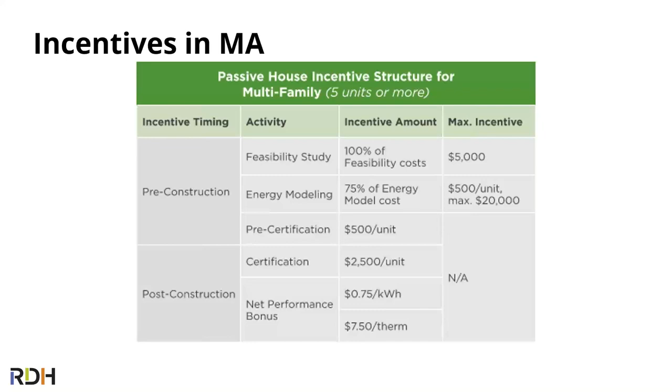And passive house has really taken off here in Massachusetts, and I know is in Connecticut as well. I see emails all the time right before the holidays - I saw many Connecticut multifamily projects being certified through those email blasts. So it's really taking off.

This is another slide courtesy of DOER from that presentation, and that Bunker Hill project is actually one that RDH is involved in, a very large development, which we'll show shortly. But many architecture firms are taking on the challenge of designing these passive house buildings. Passive house consultants - architects are becoming passive house consultants. Ideally, clients are too. It really helps when everyone is speaking the same language. So Passive House really provides that common language, which is really in sync with the goals and strategies for achieving decarbonization.

In Connecticut recently too, decarbonization was signed into law. And it's interesting, we'll see, it will be all similar strategies as well. The Connecticut incentives reflecting similarly the incentives in Massachusetts as well.

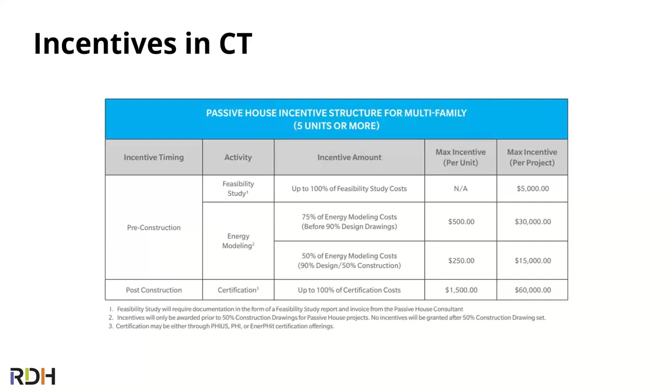So of course, RDH performs passive house feasibility studies as well. It's basically the first step we take in a passive house design process anyway, and it's great that these local incentive programs are supporting this step as well. It's at this point that we define certain targets relative to achieving the passive house standard.

What are the R values of roof, wall, slab? What are the U values of window? What is the percentage of glazing that we currently have, and what would it need to be if it needed to be reduced at all, decreasing solar heat gain, things like that. Taking site orientation and shading into consideration, all these things, we can determine the feasibility of a particular project achieving either the PHI or PHIUS standard.

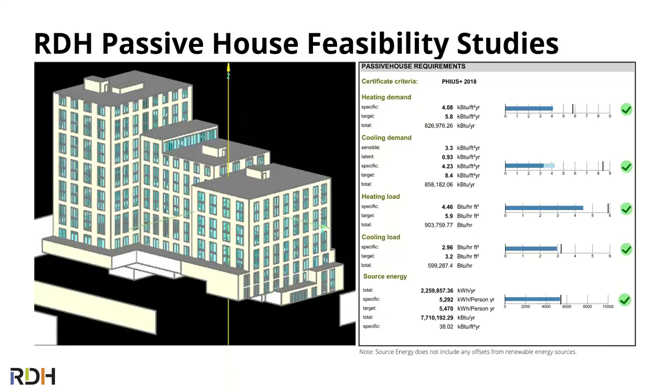In this case, this is a screenshot from the WUFI passive modeling, which is software used for PHIUS certification.

So architects and engineers are responsible for adaptation. For those in the high performance building community, there's a lot of talk about adaptation and mitigation. And buildings need to protect human life in an increasingly hostile climate. This is not unfamiliar to many folks.

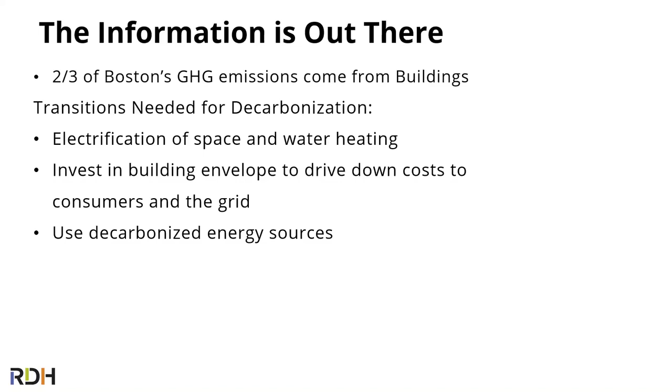The decarbonization report for Massachusetts actually highlights particularly 3 steps needed for decarbonization: electrification of space and water heating, investing in the building envelope, which will drive down costs of energy for consumers and the grid, particularly if we level off those peak times, and using decarbonized energy sources, i.e. renewable sources of energy to run electrified buildings, taking the on-site combustion out of the equation, as well as at the grid level.

So the information is out there. We know this. The result of our carbon emissions, if we fail to curb emissions, may look something like this. Zeroing in close to home here, among the report released recently by NOAA, they've got a great online sea-rise simulator that you can go play with, and I urge everyone to go check that out. Taking Boston at its worst case high tide mark 100 years from now, this is what Boston could look like at high tide if we fail to curb our current emissions.

Thankfully, we are taking steps to do so, but this could be the most extreme level of result.

Regardless, NOAA predicts that even curbing our current level of emissions could lead to about 2 feet of sea level rise on the US coastline by 2100. So resiliency and carbon emissions, again, are tied together. And as we know, much of that is coming from our buildings. So what do we do about that?

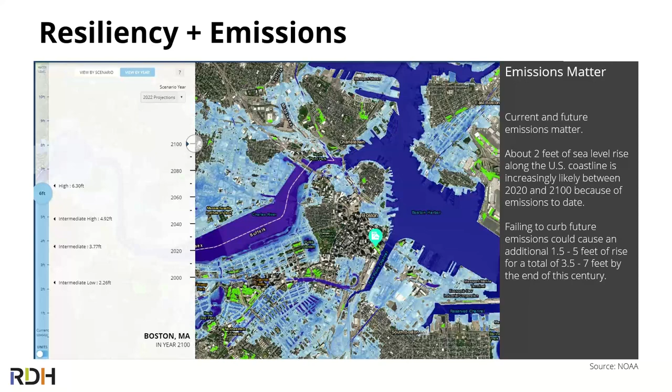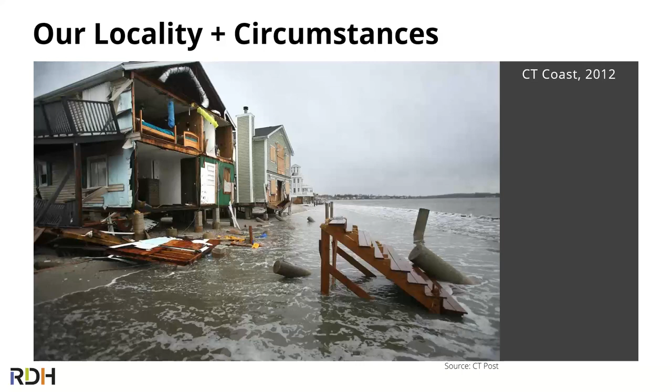It was kind of unbelievable to see this actually happening. And of course, 2012, after Hurricane Sandy, the Connecticut coast, along with New York and Long Island, really took a beating. Just looking back at some of the images for that. This is our locality now and our current circumstances. Our circumstances in our locality have evolved.

So just taking a look at the standard of care for architects, it's worth taking a read through this. The architect shall perform its services consistent with the professional skill and care ordinarily provided by architects practicing in the same or similar locality under the same or similar circumstances. The architect shall perform its services as expeditiously as is consistent with such professional skill and care and the orderly progress of the project. So again, our locality and circumstances are evolving.

So really, it is on us as architects and engineers to plan for adaptation in our buildings. Every building needs a plan. We need to adapt for flooding, overheating. We need to reduce our greenhouse gas emissions to zero. We need to strategize for future carbon penalties.

They're not here yet. They are in Canada. Monte can attest to that, and increasing. We see a preview of this with Local Law 97 in New York City, right? Phased penalties for certain levels of carbon emissions from existing buildings over a certain size. That'll be interesting to keep an eye on. In the range of carrots and sticks, that's the biggest stick we've kind of seen to date.

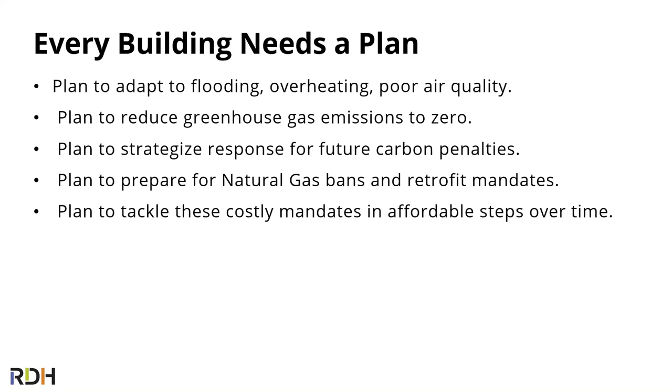So, case studies. I have a series of more local passive house projects, which by comparison to some of those in British Columbia may seem somewhat primitive, but it's some of our first steps, some of our first generation of projects here in the Northeast. The interesting thing about some of these projects was I personally played a slightly different role in some of these projects.

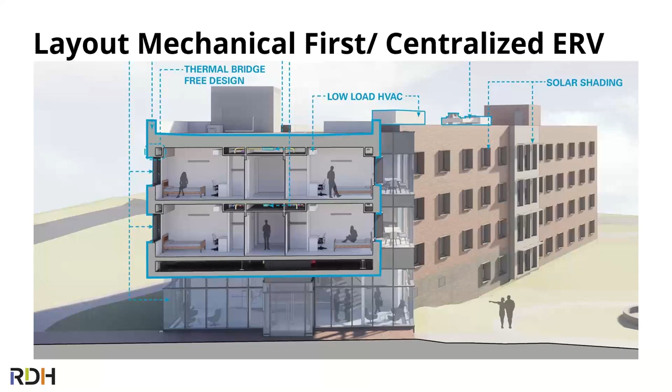Other points from Monte's pattern language presentation are highlighting brise soleil. So shading was carefully considered to reduce peak cooling in this building, which is often one of those key targets in larger multifamily projects, that peak cooling tends to be one of the closest to the limit. So with the larger buildings, there's greater internal heat gains from people and equipment, and therefore we don't want to rely as much on solar heat gains, and in fact want to limit them in larger multifamily buildings as compared to smaller single-family passive house projects that you may have more traditionally seen.

So in this particular instance, this is achieved in a couple of ways. The typical punch window opening takes advantage of the thick buildup of the brick, basically rain screen assembly, as well as projecting a brake metal surround beyond that to achieve about 17 inches of shading on the typical punched opening, which as a 5-foot square was adequate to shave off enough of the solar heat gain to keep our peak cooling under the limit.

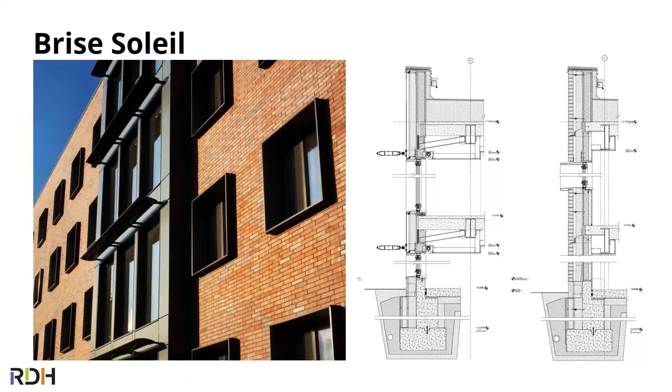Another one I had the pleasure of working on while at SGA was the Garfield House at Williams College. I was not the project architect on this, but I jumped on and performed a sort of in-house passive house consulting role and helped develop some of the enclosure detailing for this project as well.

And this example shows how passive house buildings can take the form of any type of building. In this case, a sort of larger wood-framed vernacular New England type of residential building. So the typical floor plan centers around a large common space. It's a 40 bed building consisting of 4 and 6 person suites.

Some inefficiencies occur with a less dense floor plan here. Cost per bed goes up in this suite type of layout clearly versus singles and doubles. And in this case, this was a 2x6 construction, cellulose in the wall cavities, 3 inches of polyiso outboard of the sheathing. It was a fairly cost-effective and simple type of assembly.

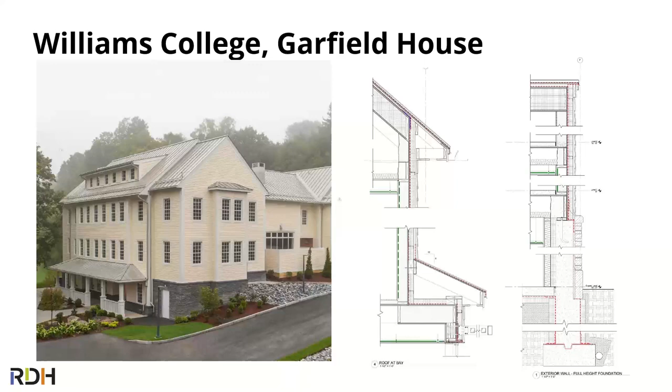A SIPS roof provided a simple underlayment for a vented metal roof above, with again a central ERV system housed in the attic space there, which is within the passive house enclosure. Again, brise soleil taking another form here, more of this ladder style of shading device as required over the windows in the south orientation.

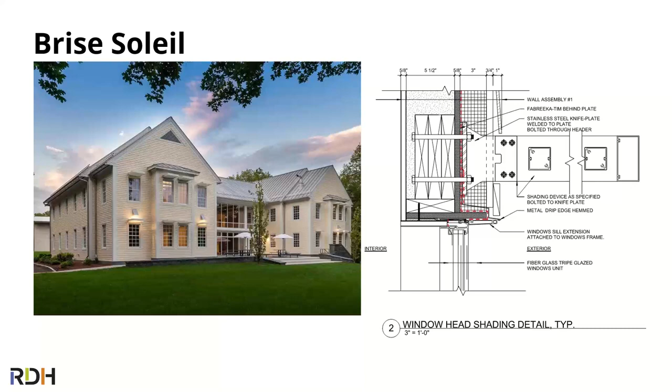So other lessons learned include, both Williams and Wheaton, centralized all-electric domestic hot water is still a challenge. Both projects utilized a condensing gas boiler for domestic hot water as well. This particular project is set up to be swapped out with another potentially all-electric system down the road, so it's all electric ready. At the time, it was quite a challenge to come up with a centralized domestic hot water system locally, and I know we've had other projects that have achieved that, and maybe Monte can get into that with some of his examples as well.

This building actually did not utilize active cooling, and we saw that is possible in climate zone 5 here, but with dehumidification as part of the ERV system. The humidity definitely needs to be managed here, and we saw there was a higher cost per bed in a less densely populated floor plan.

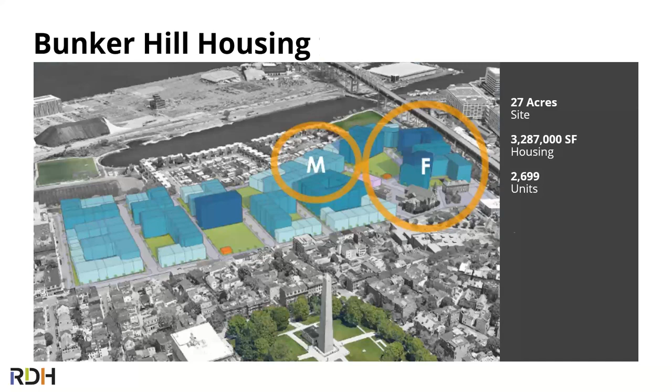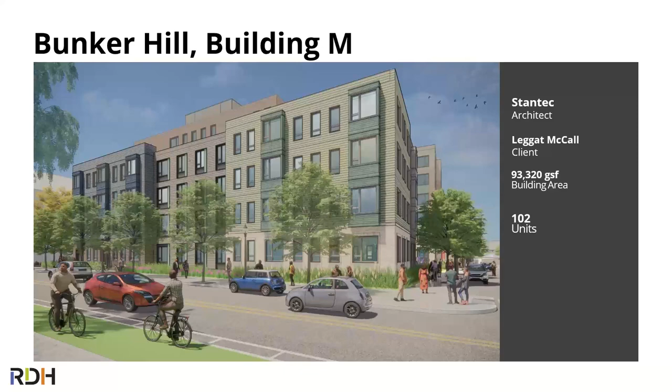So building M, the smaller of the 2 buildings we're working on, 102 units, 93,000 square feet. Trying to utilize similar details and systems between both buildings, and the larger building, building F, 249 units. And both of these buildings, we're working closely with Peterson Engineering, who is the passive house consultant that had been retained very early on in the design process. And as passive house consultants ourselves, working on the enclosure consulting, we're collaborating closely with them in achieving passive house compliant designs.

So another pattern that we strive for in passive house buildings, compact form, and in this case also a relatively low window to wall ratio. And I know Monte has slides on form factor as well, but reducing the surface to volume area, where we maximize the volume to the minimum surface area in order to reduce transmission loss of heat through the enclosure, is something we strive for. So more compact forms retain the heat we're trying to retain better. So both projects here are pretty good examples of fairly compact form, as well as maintaining a pretty responsible window to wall ratio, plus or minus 20%.

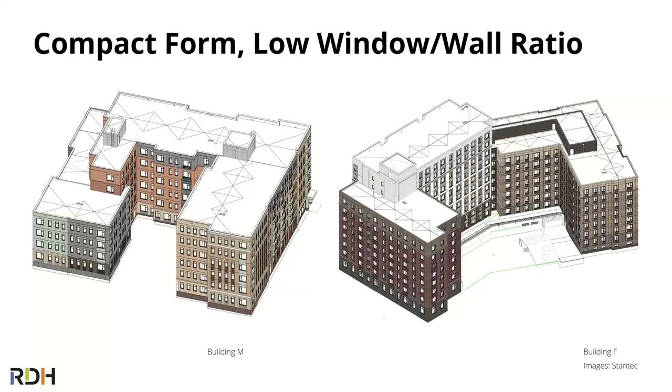This is also a mass timber project. There's a couple of ways to approach mass timber. In this case, they're utilizing standing panels. They're utilizing load-bearing exterior wall panels. This requires a floor-by-floor construction sequence with temporary wall bracing at each floor.

The panels include stud sheathing, air vapor barrier, exterior insulation, and the cladding attachments with leave-outs to come back and lap air vapor barrier over the edge of floor plate and plug that with the mineral wool insulation as well before installing the final rain screen material. So some lifts will be utilized on site here for those leave-out conditions and the final cladding, but this is largely prefabricated with these standing load-bearing panels.

And of course, there are challenges with that as well. At the edge of slab, coordination with the structural engineer is required to accommodate any potential shrinkage of the CLT floor plate there, and detailing the exterior cladding needs to account for some of that shrinkage as well, leaving joints for that can potentially reduce in size as well.

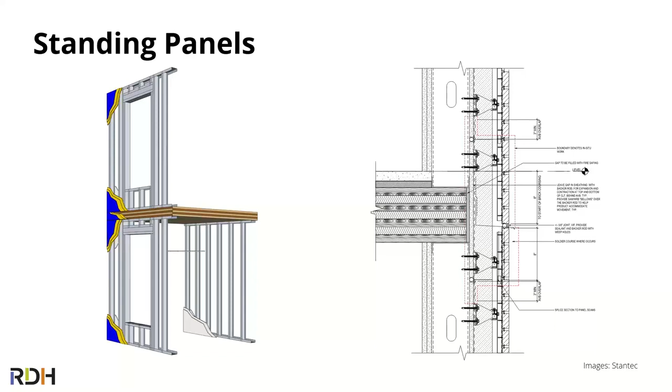So again, I mentioned that RDH is performing a mass timber consulting role in this project as well. With mass timber versus other types of construction, even more conventional wood frame construction, we can see that there are different moisture risks for this type of system. The real risk is the top getting wet and absorbing water, but more importantly, the edge grain wicking water, and that tends to be where we see it. The edge grain at splines are also placed, and the splines being often of a plywood material tend to absorb water faster than the cross-laminated timber floors themselves. So that tends to be an area that needs to see some moisture protection as well.

And this is important because on the bottom here, if you lock in that moisture that's on top of a CLT floor or roof, because of all the layers of wood plus adhesive, drying to the interior, to the bottom, takes potentially up to years. So you have moisture trapped in this assembly in a way that doesn't happen in other assemblies. So steps need to be taken to account for protecting the mass timber, both in transport and on site and in construction, as part of the final assemblies to mitigate risk of moisture damage to that CLT.

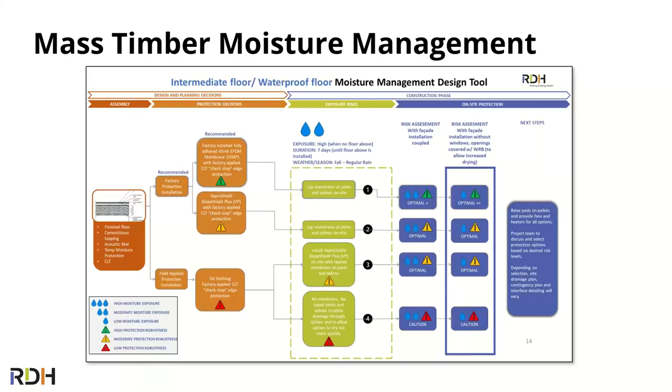And here's a page from the Master Moisture Management Plan that RDH has developed for this particular project. In this case, this is looking at the intermediate floors and different factors that go into that, where we try to help the design and construction team develop a plan that is integrated into the design and detailing of the project, taking into account products that the team wants to use, that are available, seeing what can be applied in the factory versus on site, and ideally pairing the level of moisture protection to the risk factors, the time and exposure and time of year that a particular project would be exposed to.

Another pattern that we look at with passive house buildings are windows with a purpose. Windows serve many purposes. Windows and other fenestration. Designing them for the required views, lights, and articulation of the facade is considered. But window-to-wall ratio also needs to be considered to balance the R value requirements of the opaque exterior assemblies with the glazed assemblies. Windows are a critical component in passive house buildings. So not only do they let in solar heat gain or limit solar heat gain, but the very design and placement of the windows themselves has a lot to do with thermal comfort and condensation risk targets of the project, and that's something that becomes very important in a high performance building enclosure.

For occupant thermal comfort, you want roughly equal interior surface temperatures between glazing and opaque assemblies, and you want that as close to ambient air temperature as possible as well. And you can achieve this with high performance assemblies, but when you have a potentially extreme delta between a really well insulated air sealed wall and a lesser performing window, that now becomes the coldest surface and becomes a real place for condensation risk. So high performance glazing selected properly for the project based on the early modeling is important. And also the placement of that is important in the exterior wall assembly.

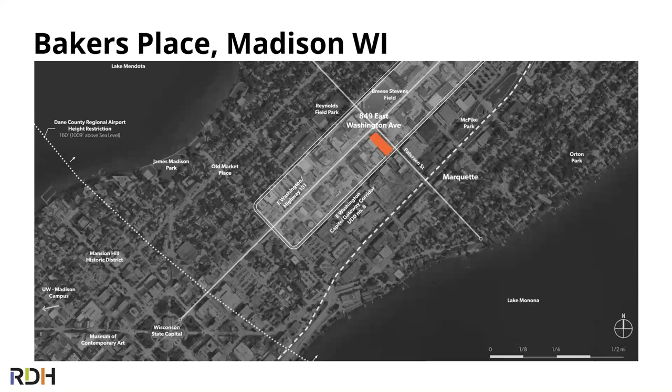So this particular project, Baker's Place in Madison, is a collaboration between Michael Green Architecture and Angus Young locally. The client, the Neutral Project, is an ambitious group of young developers trying to do good. This project, Baker's Place, is a really interesting site with a lot of interesting views to both adjacent lakes as well as other buildings downtown. Really exciting project in general. So again, we saw this image already. That image is actually for this building, for Baker's Place.

So we start off with setting our targets for the building to help the design team understand what types of assemblies we're going for, and if our window-to-wall ratio is working based on reasonable performance that can be obtained through glazing products on the market in this area. So we look at all these things, and as is typical with a large multifamily project, the cooling load is the closest target, circled here in red. We often like to maintain a 10% buffer on all targets, space conditioning as well as often source energy.

And considering that this building has a window-to-wall ratio of about 32%, that resulted in specifying a window with a solar heat gain coefficient for this site of 0.33 with a U-value of 0.15. So, those sub 0.2 U-value windows, we're getting to for glazing, obviously. And that's an installed U-value, so that takes the spacer, the frame, and opening into account as well. So these are all things to consider when trying to specify and design a particular fenestration system up front.

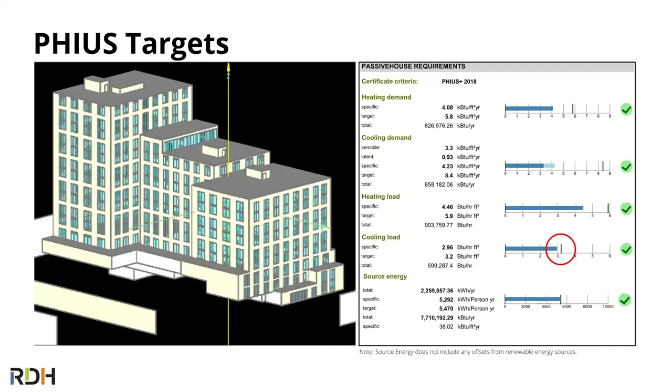And this is where RDH manages to take it a step further when integrating enclosure consulting, because we understand other factors at play beyond just specifying an R-value that may not be achievable in a particular assembly. So in this case, we start off with above grade walls that were R40, but we actually reduced that down through further studies to about an R25, and still making that work, pulling all the key levers and getting it balanced. Below grade walls are R30, floors are R30, roof about R50. So coming up with assemblies that could potentially work and hit these targets.

The second building from this client is the Edison in Milwaukee. Same client, similar targets. You know, often you're looking at a site EUI of something in the low to mid 20s for a multifamily project, particularly in climate zones 4, 5, 6 here, which these buildings are achieving. So, interesting site on the river here in Milwaukee.

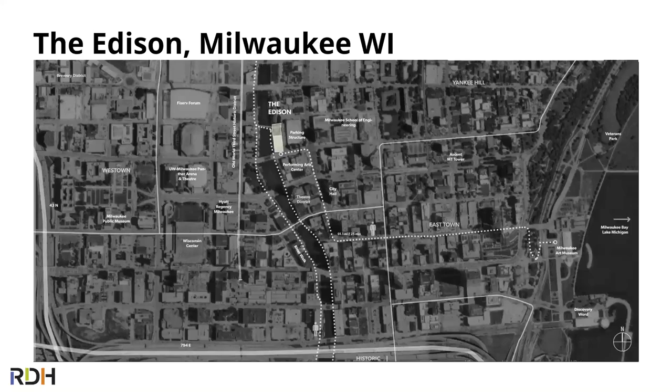And again, when we look at the modeling, it's a very similar circumstance where the cooling load is the thing that we're having to keep a careful eye on. And actually, in order to get that to work in this particular building, we required an even lower solar heat gain coefficient, 0.24, which is starting to get pretty low. So again, we have to consider that in the design process.

Things that could also help that is potentially, gasp, as an architect saying this, reducing the window to wall ratio further. That could help as well. Further shading could be introduced, but again, at the risk of increasing the annual heating demand. So these are all things we consider early on in the design.

And in this case, we're seeing that we already don't want to mess with too many factors that will affect that cooling load further, because already we have to specify quite a low solar heat gain coefficient on the glazing. And if we want to maintain clear glazing aesthetics without seeing a tint, we can't go much lower. So each building is a little different, having to keep an eye on those key levers.

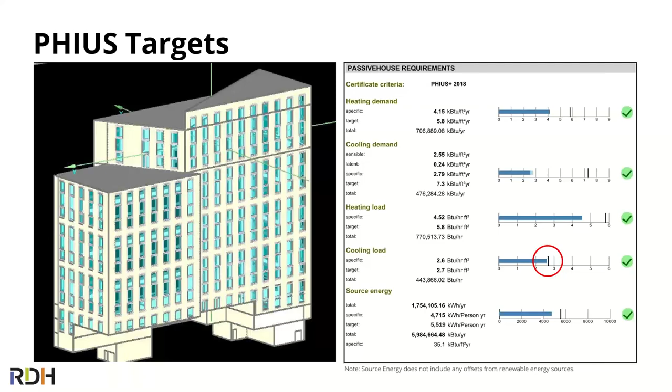And very similar assemblies here to the previous building, and we reduced the walls down to about 25 based on the studies from the first building. Similar assemblies elsewhere. And in this project, it's also attempting to do a lot. It's attempting to utilize mass timber, prefabricated wall panel assemblies. And in this case, the project started off trying to achieve load-bearing standing panels like the Bunker Hill projects did.

and currently this sort of knife plate detail extending from the top of the CLT to capture with deflection tracks the more curtain wall type of panel. And we've studied numerous orientations as well, vertical panels, horizontal panels. Ended up, working closely with the fabricator, determining that a horizontal orientation is more appropriate in this case, more efficient, easier to ship.

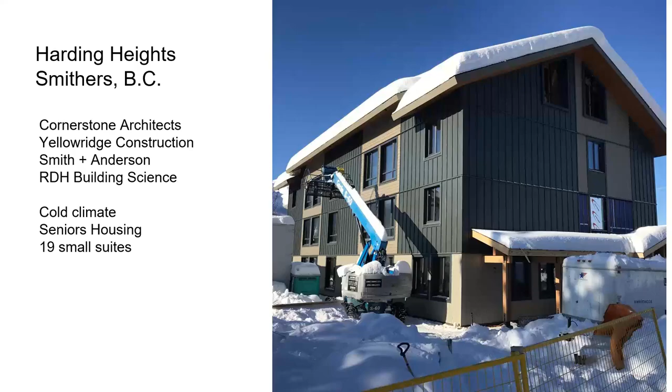It was a funny design, and it was capable of either modular or on-site construction. The intent was to reuse this design on other small city social housing projects. So most of them are studios, with 1-bedrooms at the corners.

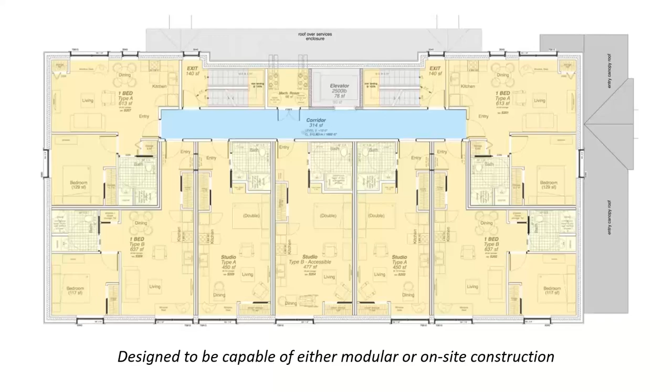Pretty compact form, nice and simple. This shows a slab on grade—it was converted to a crawl space about halfway through, but still a great compact form. Notice that tree just to the south of the building: the idea was to use the tree as a design feature, allowing more shading in summer and more light through in winter.

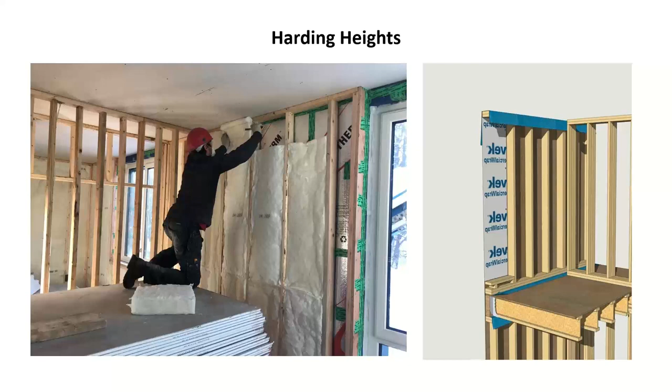It's a modified double wall—we sometimes call it the ice cream sandwich wall. It's conventional 2x6 construction with sheathing on the outside, making cladding really easy. Then inboard of the 2x6 construction there's a thick layer of foam, and inboard of that a service cavity wall. Pretty easy to build. This guy here is putting batt insulation into the service cavity wall behind a layer of, I think, 6 inches of EPS foam. The inside of that foam has a foil facing, making it easy to tape up the air barrier on this system. The nice thing about the system is you can adjust it for different climate zones just by adjusting the thickness of that inner piece of the ice cream sandwich.

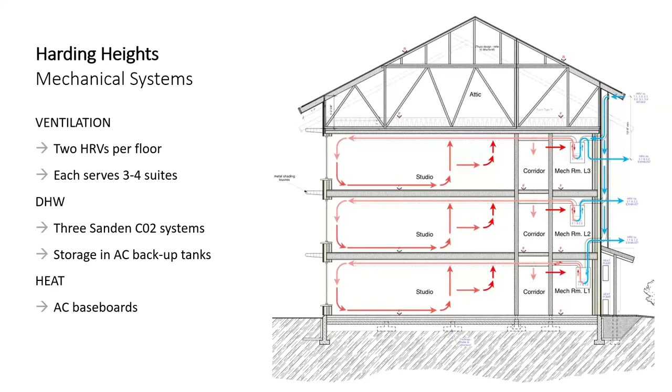Pretty simple mechanical layouts. At this time we didn't have access to large HRVs—if we were doing this building again we'd probably use one larger HRV, but most of our early projects, simply because of supply chain issues, used household-style HRVs like Zehnders and household-style efficient hot water heaters, like the Sanden CO2 heat pumps. That's changed over the last few years as the supply chain of larger systems has filled in. The heating was really simple, just AC baseboards, because the load was so low.

So everybody was happy with the building. It looked good. The construction went fairly smoothly with a couple of exceptions I'll raise here in a minute. It opened up in July of 2018. The mayor cut the ribbon, a bunch of seniors moved in, everybody was full of smiles until the end of the month, when a heat wave rolled in, a heat wave by our standards.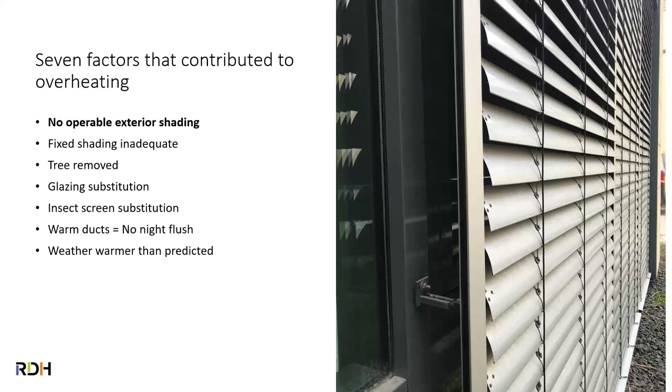So the first factor was that we had urged the client to use operable exterior shading, such as shown here. This kind of prevents any possibility of overheating to some degree because it's adjustable and easily adjustable for the residents. The social housing provider, which hadn't any experience with it, deemed it unworkable in cold climates, despite the fact that it's almost ubiquitous in Europe and Northern Asia, and too complicated. So it was rejected as too difficult.

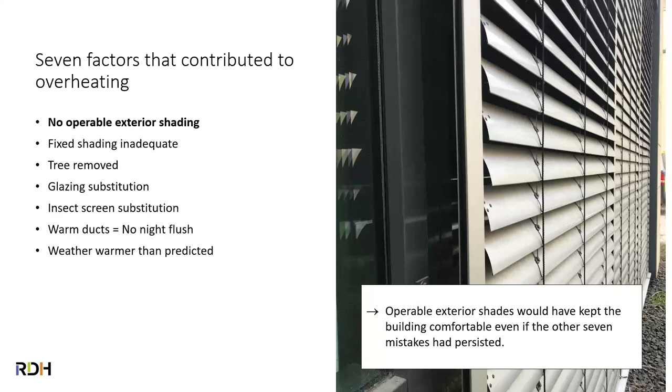Our modeling would have shown it would have kept the building comfortable even if - the fixed shading was just inadequate. Those overhangs, you can see how much light's hitting the large glazing to the south there on all those spaces. And because we're fairly north, the sun's pretty low through the summertime. It was hitting for 10, 12 hours a day, heating up, a huge amount of solar gain. And the fixed shading devices just didn't cover the windows often enough. They were too short, they were too simple, they didn't have sides to them.

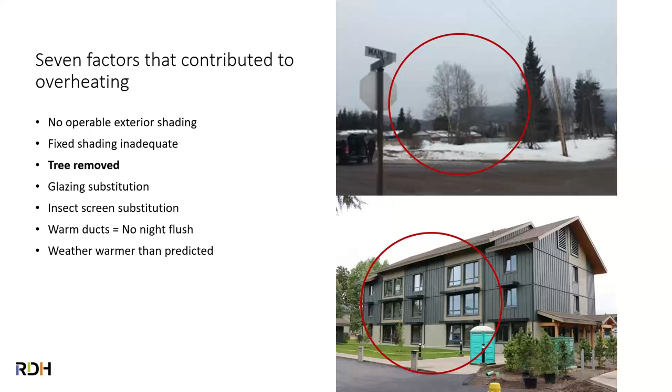Furthermore, that tree, you can see it in the middle there, which the architect, Scott Kennedy, actually moved the building over to make sure the tree would shade most of those centerpieces. It wasn't communicated to the contractor that the tree was part of the design. And the first thing they did upon arriving is cut it down and decide to put their work trailer right there because it wouldn't interfere with the building footprint or the parking lot footprint. So that was gone. Now, the key lesson here is that multifamily buildings need exterior shading or mechanical cooling in all instances.

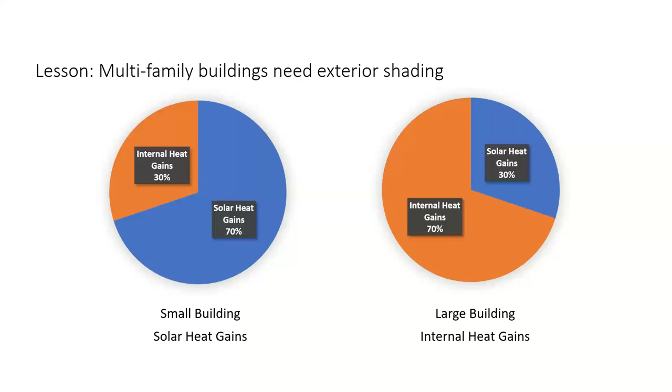Now, I know you do a lot of cooling there, and we're going to come to that. But even when you're doing cooling, the exterior shading can lower your cooling load. And if, as Andrew was saying, you're trying to manage those 4 factors in PHIUS, or really the total heat gains in Passive House Institute, being able to lower your cooling load is increasingly important for all of these buildings. So the key takeaway here is that for small buildings like a single family home, the solar gains can easily be 3/4, 2/3 of the heat gain, but in large buildings, they can be as little as 1/3, sometimes as little as 20%, much, much less, because they run on the internal heat gains of what's happening inside the building.

And then this was the killer. The contractor found a less expensive window that met the frame specs specified, and they didn't ask why it was so cheap. They were getting a quote from a European supplier that was quoting them with no coatings. So they wound up buying an adequate frame, and they ran those specs for us, and we modeled them and said, yeah, that'll work fine. But what arrived was a window with no coatings at all, and therefore a very, very high solar heat gain coefficient, or G value, of about 0.6.

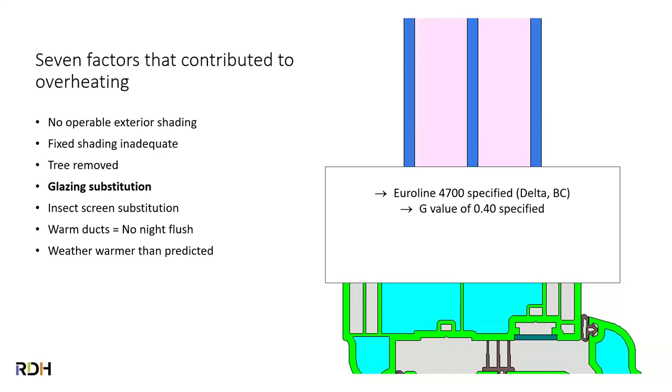So what was specified was a 0.4 G value, and what was delivered was 0.61 G value. Really huge change. And with all that sun that was hitting these windows with no tinting and inadequate shading, we were seeing a huge amount of heat building up on those south-facing units.

So as you can see with that piece of foam that's there, we over-insulated the window frame, as we often do when we use less expensive window frames. We beef up the frame thermal value by over-insulating when we clad. The contractor, as often is done in northern remote communities, ordered independent window screens. The window screens provided by manufacturers are often kind of cheap, and in northern communities, they like to put on really robust, heavy screens to keep out the black flies.

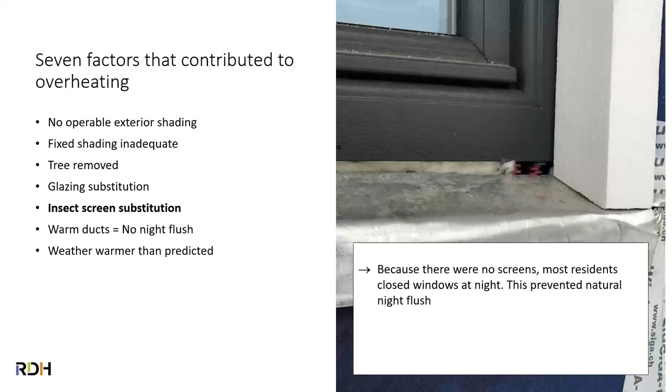The fabricator made some great screens, but they didn't fit because nobody told them the windows were going to be over-insulated. So that first summer, the tenants, to avoid black flies, were closing the windows every night, preventing the ability to drain off heat built up during the day. Their fear of black flies was causing them to trap more heat in the building than they would have otherwise. The same thing can happen in an urban community where people keep windows closed because there are a lot of particles in the air, maybe smoke from a fire event, or maybe it's just noisy. So that issue of how people operate the building has to be managed in design.

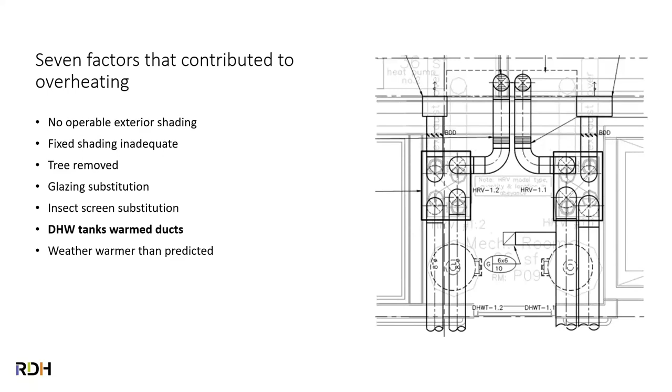What essentially happened was by closing the door and having no ventilation in there, we created a thermal bridge where the waste heat from the water tanks was pre-warming the uninsulated interior ducts, robbing the ERVs of the ability to flush at night. So it's a thermal bridge that wasn't considered — a kind of mechanical, interior thermal bridge.

Subsequent to this building, we no longer put hot water tanks and HRVs or ERVs in the same room — if we can at all help it. Go ahead. And then finally, the weather was warmer.

The average 30-year temperature in Smithers, BC was about 14.2 — that was the number in PHPP and other modeling tools. In 2018, the August average was 16.4. So we asked ourselves, was this an incredible hot zone? We looked at the years up to that point, and it turned out no — all but 2 of the preceding 10 years were warmer than what was in PHPP.

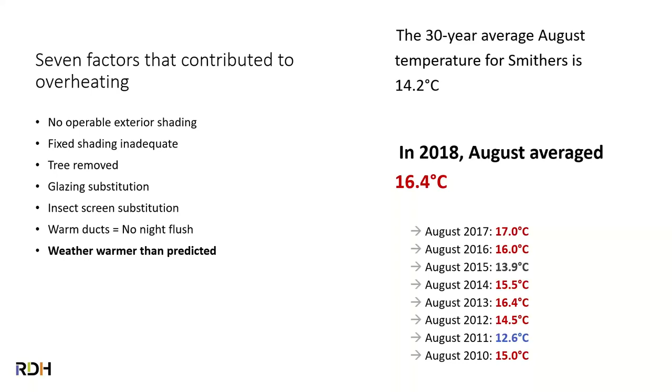This got us wondering, how could that be? Of course, what happens is the weather file in PHPP or WUFI Passive or any other conventional modeling system — they take a 30-year average, shave off the peaks a little bit, and take that from historic weather. So if you're working in the mid-2010s, you're probably using a weather file that ended, if it's really new, in 2010, or more likely ended in 2000. So it was a weather file from 1970 to 2000, with the midpoint being 1985.

So if the midpoint's '85 — picture 1985, this was when we got Back to the Future, when we had MacGyver. It was a very innocent age now in hindsight. We realized we were designing Passive House and Step 4, which is a Passive House-like code we have here in British Columbia, for a Marty McFly climate. And we all know the climate has changed a lot since then.

We realized when we look at the dashboard Andrew was showing earlier, and you're twiddling to try to get the heat load and cooling load just right, it's all bullshit — it's all based on the wrong climate number. All that fiddling is wrong. All of the work we do to adjust and adjust and adjust was off. This really shook us.

The earlier pieces we could manage, but we realized there's a flaw in all certification programs, code certification programs, or code requirement programs — CSA, PHI — in that we're using out-of-date climate files. So we started obtaining information from IPCC and adding it into our files. But we took this broader look at summer comfort.

Thanks, go ahead and click through these. Outside the building, you have solar gain — we're all aware of that. We have temperature, and we're modeling for 2050 and 2080, not 1985 now.

You have urban heat island effect, and we'll talk about that in a second. Go ahead. Urban heat island effect being, this is Vancouver. Parts of the city are much warmer than others. Same with Boston, same with any city in Connecticut. Where you have leafy single-family home neighborhoods, you have the blue zones, and where you have more urban parts of the city with more concrete, you have these red zones that can be quite a bit hotter, 10 to 12 degrees Fahrenheit hotter easily.

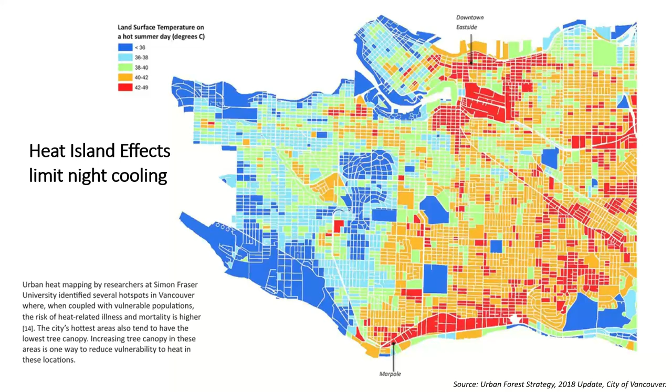And when the heat comes is at summer nights. And so it really affects these comfort criteria that we saw in Smithers and other places. So we're now considering the fact that most infill projects, which are the projects we tend to do, are in those hotter areas. Go ahead. I think there's 3 factors inside. Occupant density. Go ahead.

So the Smithers building, the whole building for 24 apartments is not much bigger than a typical suburban mini mansion, but it had 24 residents in the place that a suburban mini mansion might have 4 residents. It had 24 refrigerators in the place where the suburban home might have 2. 30 televisions to 5 televisions, 20 computers to 4 computers, 60 meals a day to maybe 2 meals a day, maybe even less if they eat out more.

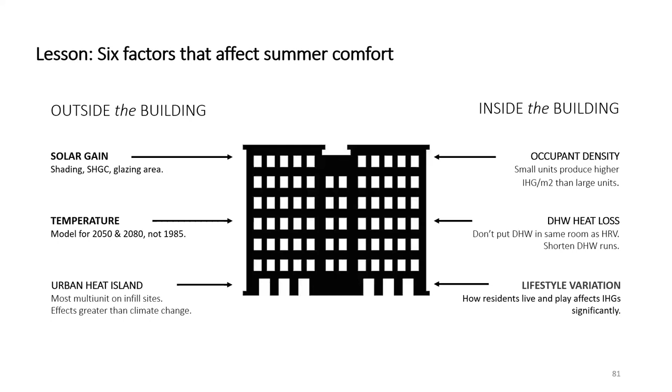So the amount of internal heat gains is really, really different. And again, the modeling protocols address these somewhat, but not fully. And so we're also creating variants around internal heat gains. Go ahead, Andrew. So to understand overheating, it's important not to just go straight to climate or just go straight to these mechanical things, but think what's happening in this building, in addition to the kind of things we had to adjust after our first Passive House multi-unit project, realizing that you need to look at all of these.

One more slide. And yeah, I think this is goofed up a little bit. Couple more. One more. Yeah, here.

Most summer comfort modeling is only looking at solar gain and occupancy density. They're not really looking at these other pieces. And if you're not looking at these other pieces as you consider the impact of your building, you're missing it. And I want to be really clear about this: it is not required for certification. The certification tests for overheating are fairly simple and they use traditional weather files and they don't require looking at urban heat island effect or lifestyle variation.

We now do it for all our buildings because, as Andrew mentioned early in this, as professional engineers, we're responsible for delivering a building where people are not going to overheat and potentially die. During our fairly wicked heat wave last summer, 595 people died in a 2-day period. Almost all of them were seniors and almost all of them died in their homes. And we realized that during these intense heat waves, that will be the pattern for years.

Similarly, there was a lawsuit in San Francisco where a condo association was awarded $10 million in a settlement from a developer because the building couldn't stay cool enough. It was overheating consistently, and the developer settled to pay $10 million so that the condo association could fix the mess. I seriously doubt that'll be the last of those. Go ahead.

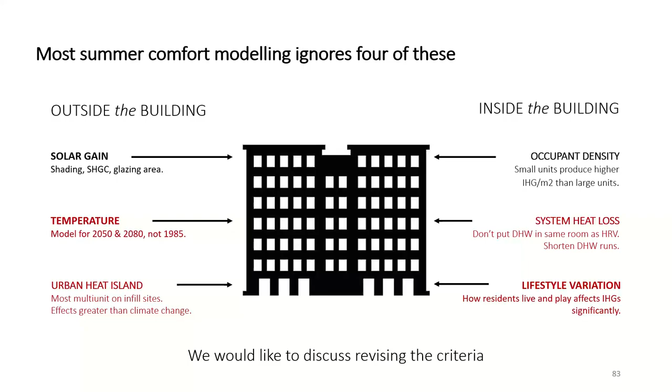So that's our first building. We've moved on, we've learned a lot. And again, our perspective has changed, where we're seeing Passive House certification as a baseline, as a kit of tools, but recognizing that we need to go further, that our need to provide buildings that will perform into a rapidly changing climate means we can't just hit Passive House, and Passive House is not the top of the hill anymore. It's a tool to help us manage all of these adaptation and mitigation strategies.

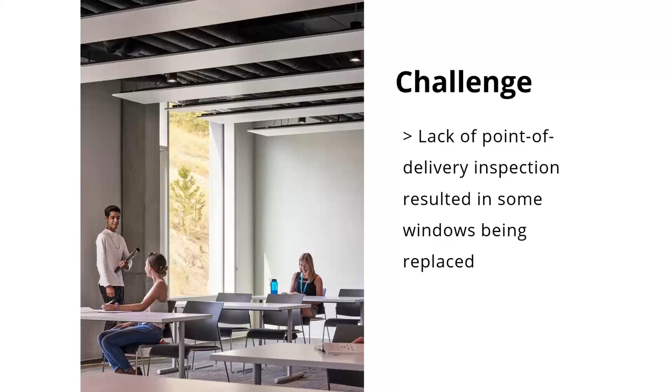And we didn't discover this until we went for one of our regular site visits, and we're looking window by window, and we noticed the spacer change. We started going through the labels. If the contractor had simply carefully read the labels against the shipping bill when they opened and uncrated the windows, this could have been avoided. But instead, they had to rip out several windows and replace them in the process, which was a fairly expensive change.

The window maker swallowed the bill. They said, yeah, it was our fault. We didn't ship you what you ordered, so it was on us, and that was good. But we're certainly learning that with these higher performance components, it's tremendously important that someone that understands the metrics of these components opens the box.

And so it's going to give the University of British Columbia Okanagan, this is in Kelowna, British Columbia, the opportunity to build its building monitoring school. They'll be doing this as part of a graduate program and see which buildings perform better. So we're really eager to see data from that a few years down the road. Go ahead.

Are we able to get the video to sound? I'm not sure if we are or not.

Let's see if we can get the video to run. Yeah, this is what happened in our pre-show. We can't hear Melvin. Unfortunately, he's giving it a great description, but I think we'll just skip the project and move on to the next one.

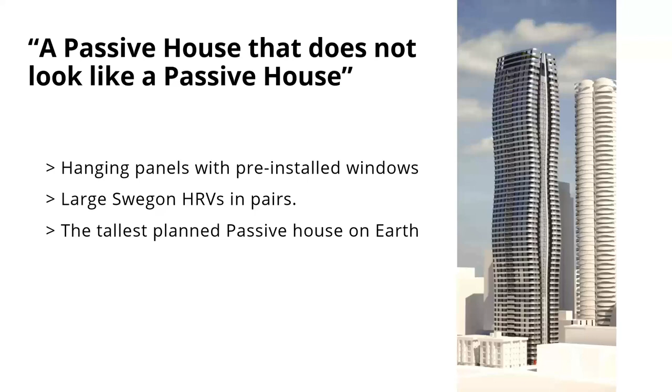This building will be built with hanging panels on a concrete frame, pre-installed windows, large Swegon, actually ERVs in pairs. They're sistered back to back, and they're just going to fit in the floor to ceiling height. And the actual size of the units is determined by the floor to ceiling height, and there's a few mechanical rooms through the building. It's the tallest passive house planned on Earth. That's 60 stories, plus a few stories worth of kind of atrium and park-like area on the very top there. Go ahead.

If you notice, I mean, triple pane, but they're one large unit rather than broken up. And so there's less frame exposed given the amount of window area than there would be. The total frame on this building still measures like 10 kilometers worth of length, but if you had broken these into small mullions all the way along, it could have easily been double that. And so the management of window design was a huge part of this.

Also, all the balconies are thermally broken, despite it being a tension slab. So the tension slab had to be designed carefully by the structural engineer so that it could hold the building together, especially as it bows out and comes back in, but then accommodate the thermal breaks for the many, many balconies. Go ahead.

Next to final project we're going to talk about today is the community center. We're doing several of these right now. The city of Vancouver has been really supportive in doing most of its own buildings to the passive house standard. So the city of Vancouver has taken a very active role in the design. Diamond Schmitt's the architect, and the people at Diamond Schmitt we've done a few other passive house projects with, Integral Group again, and us. It's a really simple building.

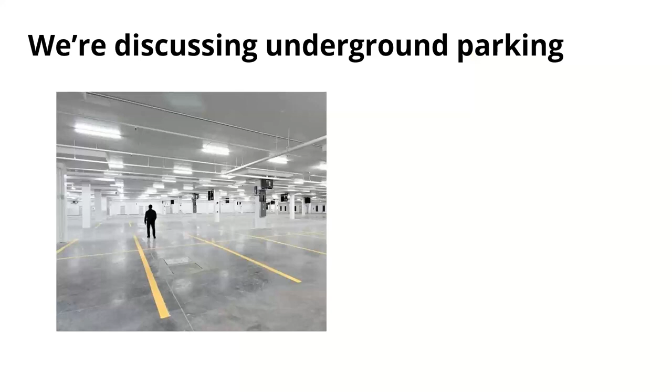One of the things we're discussing with the city is underground parking. The city, like many community centers, wants it to be easy for people to whip in on their way to work or on their way to take their kids to school, come and use the exercise facilities, hop in their car and go to the next place. But the city is also asking us to model embodied carbon and carbon emissions. And of course, every underground parkade is like an iceberg, where most of the damage is unseen below the surface.

And especially when you start doing, this is a mass timber passive house building. Go ahead and click those next 2, Andrew. Those cars become part of the iceberg. They're kind of bombs. Each car contains embodied carbon. The parking space contains carbon. And so there was this real natural tension within the city. Do we want to create less parking to move to this future where we'll probably be far more bicycling and walking and far less driving?

Or do we want to put more parking because we're trying to encourage lots of ease of use for residents now? And that hasn't been fully settled. The city's weighing that out. It was interesting that we are actually producing an embodied carbon calculation per stall and saying, great, every stall you commit has this much embodied carbon, begets a car that would probably emit this much, you know, kind of what are the implications per space?

Ultimately, we'll do what the city wants to do. I would say for a lot of our mid-rise buildings, especially our wood frame or mass timber buildings, the biggest impact we'll have as planners, as architects, as engineers, is how much we're able to minimize the parking in our negotiations with the city. It may be as important as the Passive House itself. Go ahead.

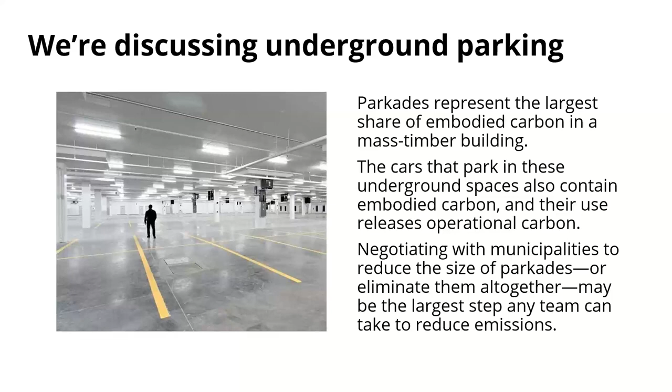We're also discussing internal heat gains, just as we have been with most of our large projects now, because we can't use the presets on these buildings. What are the internal heat gains of a basketball game or a typical workout? So we're making estimates around those, running those past our certifier.

Actually, Steven Winter Associates there in Connecticut is the certifier for this. We have a great relationship with them where they certify several of the projects we're doing here, and we're working as certifiers for some of the projects they're doing in New England. I really like working with them. And so we're working out what these additional internal heat gains are, because you can't really decide the wall system until you have internal heat gains for these mixed use buildings that aren't the typical residence, school, office building.

Go ahead. We're also discussing primary energy. Community centers tend to have very, very high primary energy loads. Sorry, again, in metric kilowatt hours per square meter per year. The previous projects at the city had shaved what had been, you know, hundreds of kilowatt hours per year as primary energy down to less than 100.

The most recent one, Clayton Community Center, which is also a certified Passive House community center in Surrey, just outside of Vancouver, BC, is down about 91, and we're going to see if we can beat that a little bit. PHI will probably set a target in that range of 90 to 130, but our team plan is to see if we can get that out around 80 or so.

Go ahead. And then the final project I want to talk about for a few minutes here is the Vancouver Art Gallery. Now, this is a new art gallery building being built on one of the last available sites in downtown Vancouver. It's been designed by Herzog & de Meuron in Switzerland. Fantastic team. It's been a real delight working with them. Their curiosity and playfulness of how they work is really enjoyable.

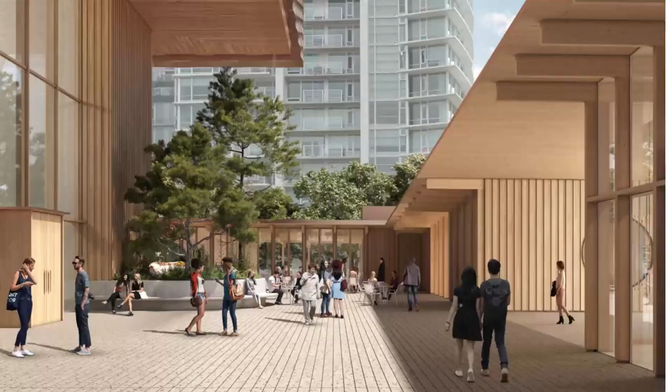The building has kind of a donut-shaped ground floor. Again, all mass timber Passive House around the outside that would be gated off at night when it's closed. So this courtyard stands around a building with a pedestal that kind of moves out like Jenga blocks above it. So you enter through the courtyard, you exit through the courtyard, and things like restaurants and gift shops are out in that outer courtyard with the main gallery being in the middle.

So the intention is to create kind of a fair, also with huge overhangs, because we do have a lot of rain here. And so we want the courtyard to function even on a rainy day with these really, really large overhangs while still being an outdoor space. Go ahead.

The building, we're using a tool called designPH. It's a plugin for, blanking on the name of it, that common SketchUp. It's a plugin for SketchUp. This is a critical design tool we use for a lot of buildings. We're finding it frustrating to use on these very large buildings because we have to remodel.

The team works internationally in Revit, where people are feeding to a common file, and that's building in multiple layers week by week by week. And we're having to pull takeoff out of Revit and then model in a separate program. That's delaying our ability to provide feedback with answers like, what if we change this window? Or what if we change this ventilation system? What if we change the floor area in this way?

So with this project, we're experimenting for the first time with creating a protocol in Revit where the Revit would have a layer specifically dedicated to passive house takeoff. And it would measure the walls on the outside.

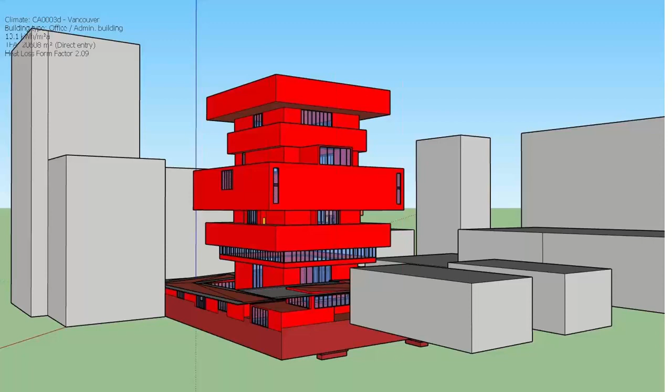And this would give us the ability to provide quicker feedback to large, great design teams like this one, as well as the ability to really quickly, at early design stage, that sort of feasibility study that Andrew was talking about, model the building both ways in PHI and PHIUS and give people a sense of what their design would do in each system and what the challenges would be in each system. Currently, it requires 2 whole complete modeling runs, and most teams don't want to look at it both ways. Go ahead, Andrew.

If you just hit play on those, I think this is an embedded video. It just has no sound, so it doesn't matter.

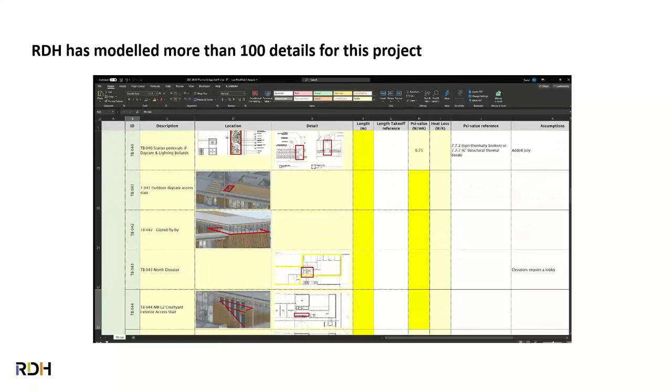We've modeled more than 100 details because it's mass timber, passive house, and a very unique cladding system. Because it's using some unique combination of timber beams and other pieces, it produced an incredible amount of new junctions and new details. And we've done WUFI or HEAT3 models on all of these that are in a database, so that as the design evolves and changes, we can keep referring to the detail number and the psi or chi values in the database and play with the building that way.

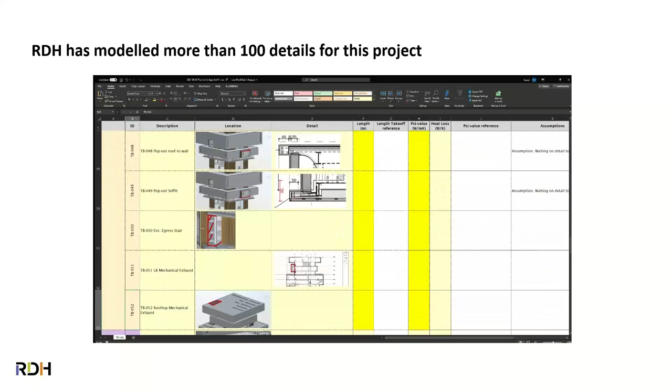On larger projects, managing this inventory of details becomes one of the challenges because there's just too much. It's not like a simple building where we have 10 or 12. There's just too many to consider. And so managing these pieces is a big part of what we do for the whole group. Go ahead.

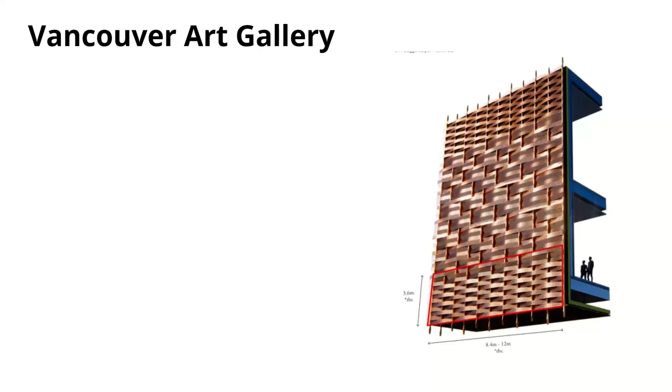I'm supposed to not say too much about the cladding, but it may or may not involve a common metal that changes color over time. And it may or may not involve a basket weaving look that's part of the traditional culture of the Coast Salish First Nations here. That will go over a mass timber and concrete structure. Go ahead and click to the next few bullet points. The cladding approach, this technology has never been used in quite this way, so there's some issues we're working through there. There's also a cost issue that may or may not get overcome.

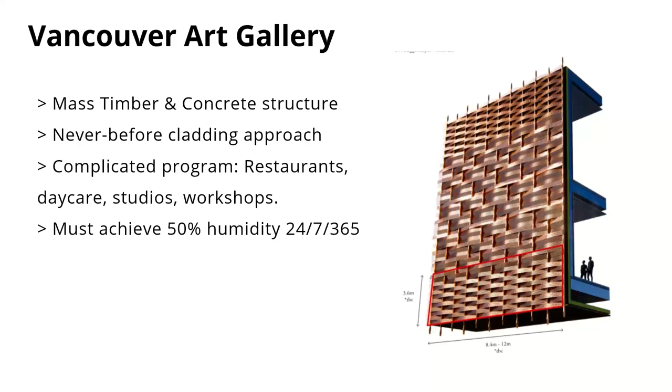The building also has a really complicated program. It has several restaurants, it has a daycare center, it has work studios, it has secure workshops, and get this, the building has to maintain perfect 50% humidity and temperature within 2 degrees Celsius all the time, 24 hours a day, 7 days a week, 365 days a year. In fact, this is a criteria much stricter than the passive house standard. It's an international art conservation criteria. Don't click yet there, Andrew.

And that's the whole point of passive house, it's easier to maintain that. It's also the whole point of the building. If they can't maintain that, they can't borrow art from like the Louvre or the Tate or other international museums, which is the goal of the new building. And the business plan of the new building is based on being able to bring in these blockbuster shows.

And so it's an exceptionally mechanically complicated passive house, and yet one that is considering how Passive House limits the extremes as part of that, and achieving that ability to maintain perfect humidity, whether it's a dry, cold day in winter like today is, or a wet, rainy day in August, and a school bus with 300 kids in raincoats just came walking in, raising the humidity in the building dramatically.

So there's a lot of airflow, but not all through the HRV. There's an air handling system, there's a dehumidification system, there's heating and cooling systems, and there's HRVs that run into all of this, all on demand sensors per floor. So it's the most mechanically complicated Passive House we've ever worked on. Now, here's the good news. And what I love about Passive House is we're not alone in this. We don't have to figure all of this out for ourselves, because there's been a few other art galleries.

What I love about the Passive House community is the eagerness to share knowledge, as others have done. This has been really huge on more technically challenging projects like the art gallery. Among the projects we've looked at are three precedents, not projects I'm on, but that we've studied in looking at this one.

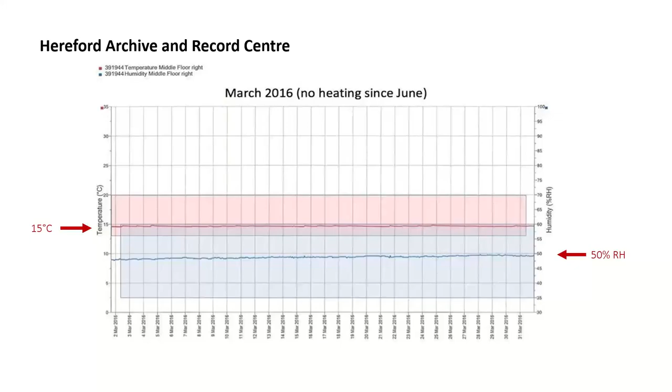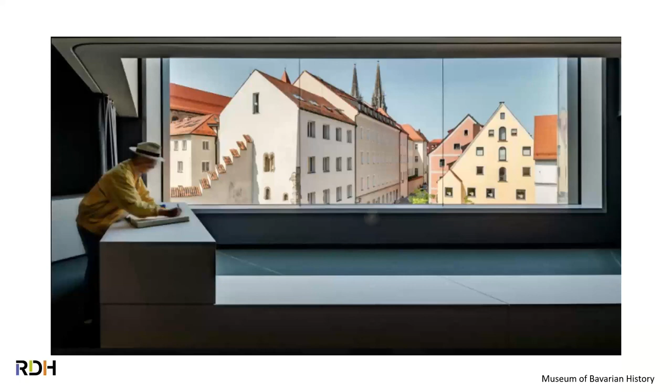It's got a classic library or gallery look and feel as you come in. It also benefits from being in a traditional Bavarian neighborhood, with wonderful spots where you walk through the museum, look out the window, and see the classic view they're celebrating in their own culture and way. It has that relationship to its community that's really nice.

They're about Bavarian food and beer - why wouldn't you be? So they have a fairly large restaurant given the size of the building, with a lot of restaurant loads to manage. This is one of several projects, along with some large dormitories we're doing in Toronto and Victoria, British Columbia, where we're managing restaurant loads and working with restaurant planners to design facilities that are less taxing on the Passive House requirement.

One of the things we're moving to is induction. The best restaurants in the world, like the French Laundry in California, have moved to all induction, and quite a few other leading high-end restaurants have done so too. It's preferred by chefs hands down - it's easier to control, makes their lives a lot more comfortable, and requires less ventilation.

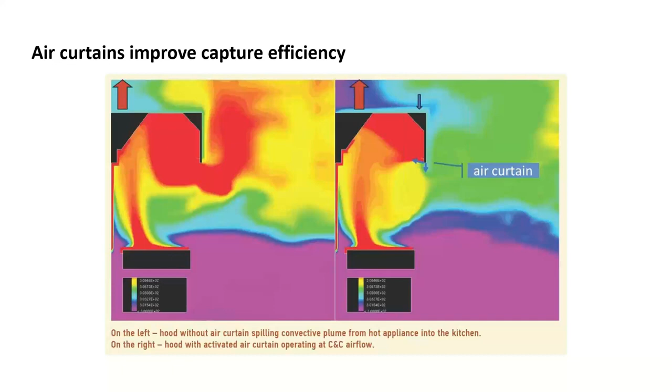So induction's an obvious choice - more induction, less gas. Over those hoods, we're putting air curtains and sidewalls to improve the capture efficiency of the ventilation hoods. The higher capture efficiency allows lower flow.

For the various coolers, especially in these open gallery kind of restaurants or student dorms, everything's closed - we don't have open fridges or open freezers. Everything's got a door, usually a double pane door, so you're not leaking as much cooling out of the rest of the building. In one of our largest facilities, rather than having independent freestanding fridges that just plug into the wall, we have refrigerants sized as needed but connected to a common compressor system, so some heat recovery can happen.

Just to put refrigerators in context as a side note - the typical American refrigerator consumes more energy a year than most African nations' households do altogether. That's how out of scale our use is, and therefore our carbon footprint, compared to much of the less developed world.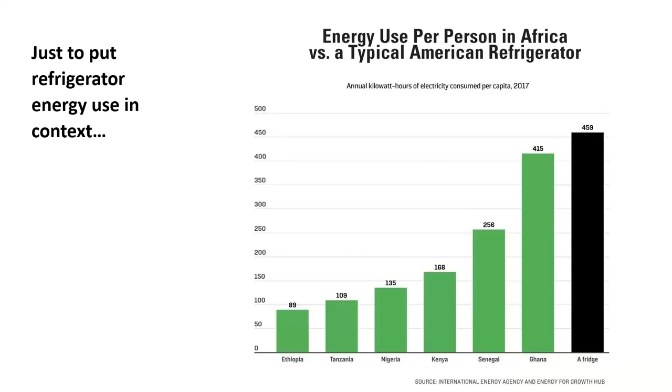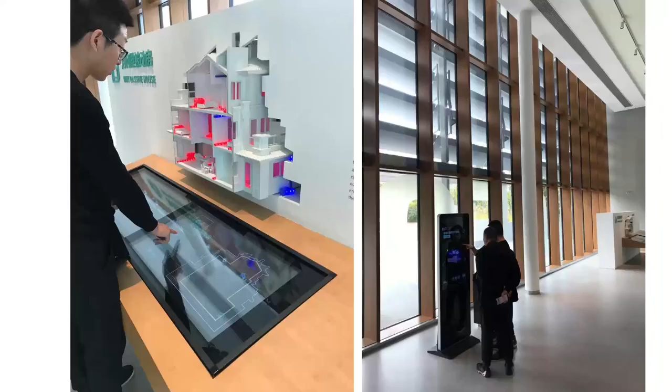And then the final reference is in Gaobeidian, China. It's an exhibition hall, a museum about passive house - a passive house museum showing off passive house technologies, which is a really interesting idea. You can see the interactive elements, you can touch and feel things, and everything is there both in Mandarin and English as you work through the building.

Fairly classic fins on the outside. You can see how well the outside of that south-facing wall is protected. That combination of getting great light in when they need it and fending it off when they don't makes the design of the building pretty simple.

There's exhibits explaining thermal bridging, ventilation, all these kind of pieces. You can move those levers and feel some of the thermal bridging happening through these pieces. It's actually quite interactive and kind of neat, in a kids science museum kind of way.

So we've looked at and talked to each of these teams and been able to learn from them as we do the Vancouver Art Gallery. I think that's what's really great about Passive House, and I urge you to reach out - when you're working on something, whether it's your first project, reach out to teams who've done it before, hire teams who've done it before. In our case, we've done many projects, but it's our first art gallery that has to meet this international conservation standard. So the first thing you do is talk to other folks who have met that standard and consider the options they used.

Let's move ahead, Andrew. One more slide, go ahead. I get asked the same two questions about once a week for more than 10 years now. Number one, how much does it cost to build a multifamily passive house or whatever kind of building? And I often find people think the answer is going to be 30, 40, 50% more over a baseline.

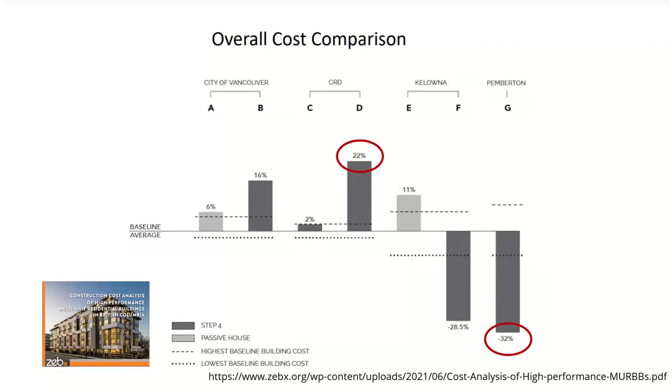It's a crazy widespread. Even more confusing - go to the next slide - where the expense went, into what systems, envelope versus mechanical versus others, there's no pattern there either. It was kind of all over the place.

So the biggest thing we learned in our first study is we didn't know what we were doing. So you had some teams that overspent and some teams that managed it really well. But the interesting question here is, what do those projects look like, F and G, the ones that managed really well?

Go ahead to the next slide. Oh, it's not here, sorry, go back. I thought I had put in a slide of it, but I guess not.

The building in Pemberton is a simple double-loaded corridor, simple form factor, modest window size - all the things Andrew was talking about earlier, they had nailed. And by just following all of those little patterns - careful mechanical, early mechanical planning, great process, a team that worked together. It was a developer builder, so there was a lot of ability to work internally. They didn't have to have as many bids out. And a builder that had been building affordable housing for a long time, with trades and subs well known to them, with long-term relationships.

So there is no one magic to keeping it below predicted costs. It's just good management all the way through.

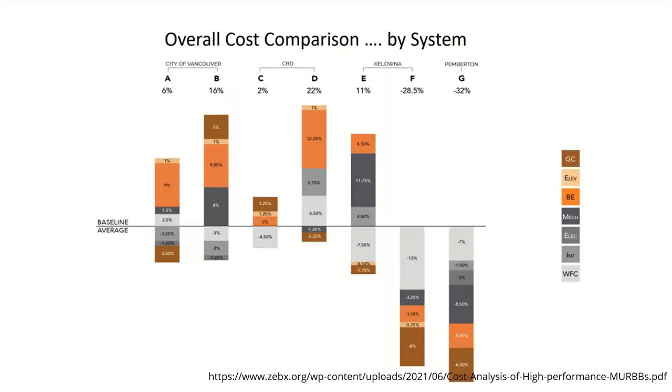And they found first costs between 1% and 8% over baseline. This is about what RDH has seen on our projects at this point too. Most of our projects, they're not as wild as those early days, but the warning here is you might find early day costs are spread out more because of inexperience.

And what we learned in this Passive House Network study, and a similar study by Passive House Trust in the UK, the biggest thing we learned is the number one factor is the experience of the project design team. It's not what cladding you picked, or what ventilation you picked, or what windows you picked. It's the experience of the design team that manages the costs down closer to 1 or 2% over baseline rather than up around 8, 9, 10% over baseline.

Now, I think the range has something to do with the way public housing is funded in the US. We're working on several projects, including a mass timber passive house project in Connecticut, and I've learned quite a bit about how these get funded there. I recognize the funding formula forces you to hit a low budget because you're only going to get so much money, and so they do hit low budgets. And I think that's good discipline.

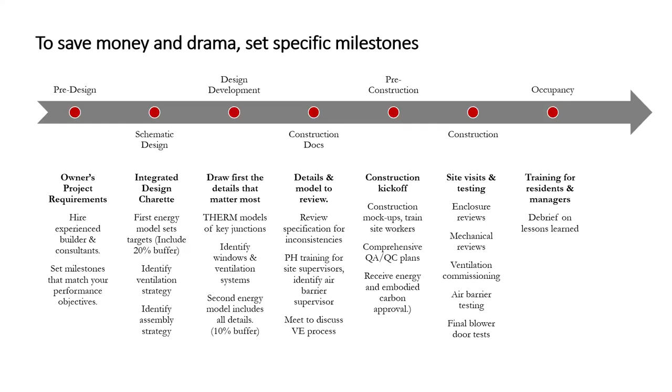Great, we want to do this again, we don't want to do that again, I want to try this on this building, well, I'm not sure about that. An experienced passive house team that's worked together before, that second building is just like any other project. You can make a heck of a lot of decisions the first meeting. Go ahead, I think there's just one or two more here.

Okay, you might find this daunting. And for fun, it's great to think about the passive house process a little bit like the hero's journey, as Joseph Campbell and so many have described. So the call to adventure comes in your first project. Wow, I've got a passive house project or another high performance project.

You often have a refusal to the call. A big part of every action movie is the hero has to decline to go on the adventure a couple times. And this often comes in the form of developers saying, oh, passive house is going to be too much. It's going to cost 30% more. We could never do that.

Somewhere you cross the threshold, maybe you've done the CPHC training, maybe you got your proposal approved. You move on to the trials and tribulations stage of the hero's journey. Often presenting in the form of code officials who are like, what, you can't run ventilation this way. What, this is not enough cooling load. What, you can't put in the window this way. I've never seen tape instead of caulk. Working through code officials who've never seen what you're doing before is hard. And so educating them and bringing them into the process is really important.

There's a despair and hopelessness point where you get your initial review from your pre-certification or your design stage review and you're not passing and you're like, oh my God, are we ever gonna get a passive house? Or you're getting all these change orders back from the value engineering or from initial costing where people are saying, what, you have no idea how expensive triple pane windows are.

And many of our first projects, it doesn't happen anymore, but many of our first projects and the first times we started doing more commercial passive house hit a death point, and it usually comes about the beginning of construction, at the end of construction drawings and tender, where either the constructor or the owner or somebody is saying, I don't know if this is worth it. Do we really want to do this? Should we just build a good building and not try to certify?

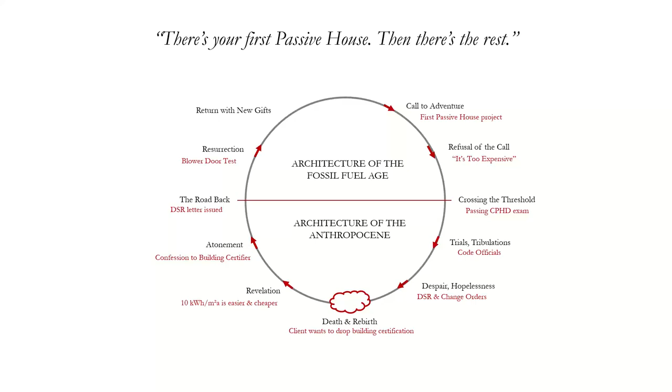The road back, you finally get your pre-certification letter or your design stage review letter. It's the same thing in the two different systems. At some point you pass a blower door test, which feels like resurrection. It feels like you're back on. You pass your ventilation test, you pass your blower door test. Everybody's like, wow, we're going to pull this off. This is really going to happen. There's a sense of excitement. And then at some point you've got the plaque and you can return with new gifts as the hero coming back from the field.

I'm totally serious. Everybody has a hard time on the first one. The second one feels a lot easier, and by the time you're on your third or fourth Passive House project and working with the same people, the same team, maybe not all the same, but quite a few of them, you couldn't imagine doing anything else.

And you're ready then to start thinking of Passive House as this baseline on which, great, we're also going to be preparing for the 2050 climate and the 2080 climate. Great. We also have to think about all this flooding. So we have to think about our ground floor really differently and maybe not put any mechanical on the ground floor. You know, in New York, in many places now, it all has to be second floor or higher. Like there's all these new requirements that are not part of Passive House, but need to be considered nonetheless.

Do we have one more, Andrew, or is that it?

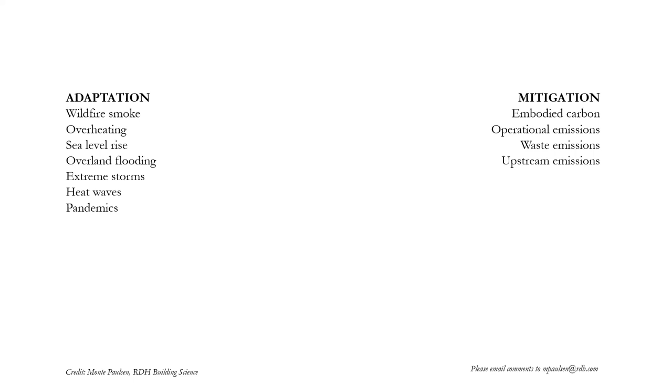Oh yeah. So as you think about all these, you know, the real limits are adaptation that can include factors like mentioned here, smoke, overheating, sea level rise, depending on where your site is. Mitigation, embodied carbon, operational emissions, waste emissions, upstream emissions, all have to be considered. Again, not part of Passive House.

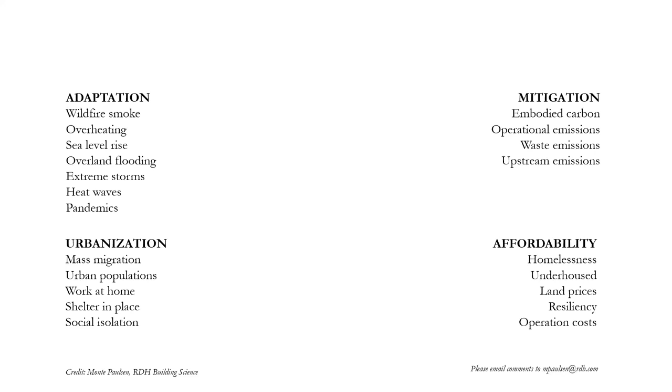Urbanization, half the population on Earth will be moving by 2070 because parts of the Earth are just going to be really too impractical to live in. Urban populations are growing, the desire to work at home, shelter in place. And of course, affordability is harder every year. Really been hard through the pandemic as we've been watching rates spiral out of control for a lot of these projects. So there are strategies. You know, adaptation might involve elevating or relocating the project altogether.

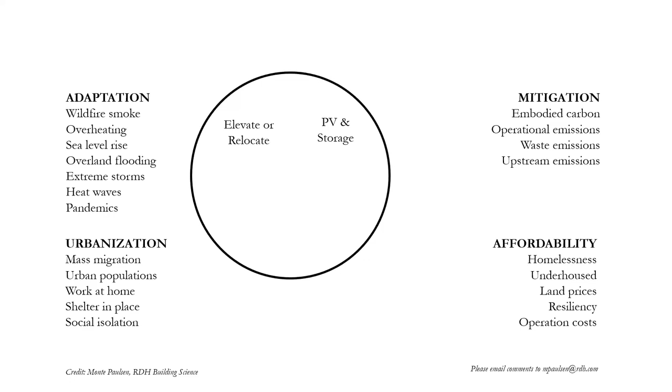Go ahead. PV and storage suits adaptation and mitigation requirements. And so if you start to build a Venn diagram, you can put PV and storage in both categories there. Some of the mitigation pieces and affordability pieces, you know, electrification is a great mitigation piece. It doesn't do everything. It's not a fix-all for the building, but it's a super important part of the strategy.

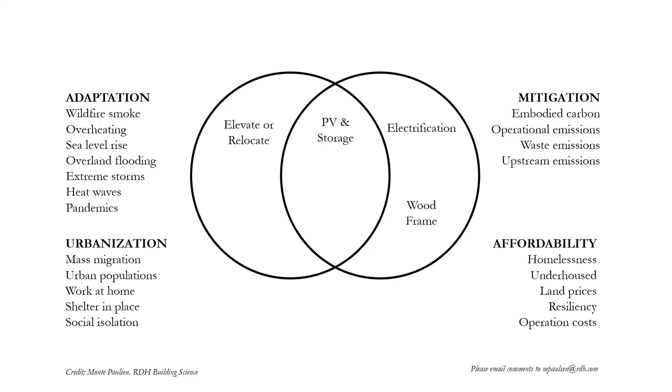Wood frame construction is both a great mitigation source and is affordable in most cases, probably more affordable than other options. Simple form factor, as Andrew mentioned, really important to affordability, but also affects the other criteria. Go ahead and do the next two. Mid-rise rental is a great urbanization strategy and affordability strategy. Urbanization includes things like walkable, bikeable neighborhoods, less driving, and of course, large apartments.

What we're going for here is the best of the Venn diagram. We can't do it on everything, but we're looking for patterns that can be repeated that will achieve multiple things and allow the building to cost less. Solutions that hit more than one of these real constraints. So we're picking over what's worked in previous Passive House and high performance buildings and trying to choose from those checklists and palettes to find solutions that will guide us through this next 50 or 100 years as these real constraints become more and more pressing.

And again, back to the hero's journey bit, getting to Passive House doesn't really matter. I don't really care if you do PHIUS or PHI or something else, you know, it's a climate emergency, just do something. So getting to Passive House, it's important and it feels good, but it's not the main thing. Getting a building in which people are gonna survive in a world that the IPCC currently guesses is gonna be 2.6 degrees warmer than anything that we have ever had a human live in on this planet in 500,000 years of human evolution up from apes.

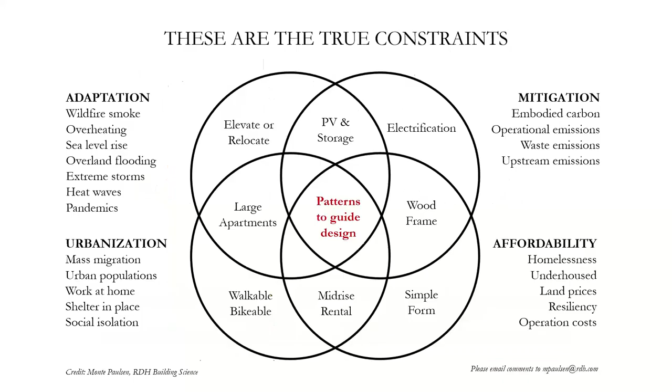All right, let's see. I work for HUD and have an opportunity to suggest trainings. What vendors or trainings do you recommend? It's a good question. I think it's valuable early in the kind of growth of Passive House in your community to train as much as possible. I don't know if we can see faces of other people. If we can, that'd be great.

So we try to get lots and lots of people from government agencies, from architecture firms, from engineering firms, as many people as possible through a good one-day basics course. I know that both PHI and PHIUS and Passive House Network and Passive House Accelerator offer various versions of this. We try to have as many people as possible at least have a one-day course to understand how the process works. How is a building certified? What is a Passive House?

And then the mistake that a lot of architecture firms made initially is they would have two junior people become CPHDs, but people who weren't involved in discussions about buildings very much, and they'd say, oh, we have a Passive House expert in the office, but really not include them in the critical early decision making. So it becomes really important to have most of the project managers in a firm doing these kinds of buildings trained to get the CPHC or CPHD credential.

I don't think there's a tremendous amount of difference between the education of American PHIUS education or PHI education. I think the difference is each one trains you to do their certification metrics. So if you know you're gonna do one type of building or the other, it would make sense to train in that discipline. I also think it's really smart to have in your organization some people who've done the PHIUS training, some people who've done the PHI training, so that you can roll either way. At RDH, we try to have some PHIUS experts and some PHI experts in the company sprinkled around so that we're capable of doing whatever our clients might need.